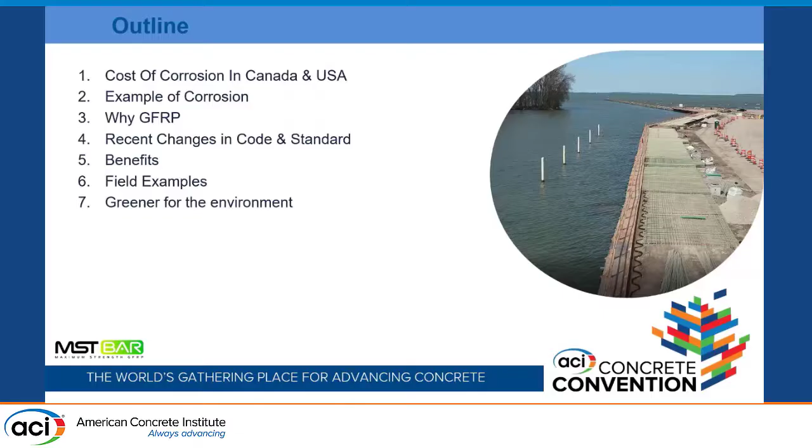This project is Port Clinton in Ohio. The entire port, 1.2 miles, was designed with epoxy-coated rebar. Everything switched to fiberglass rebar, and its installation cost and everything was better than traditional epoxy-coated bars.

This is not new. The cost of corrosion in Canada was estimated to be about $52 billion US. In the US, that's probably about $0.6 trillion. Who's paying for this? Taxpayers. All of us are paying for all these repairs.

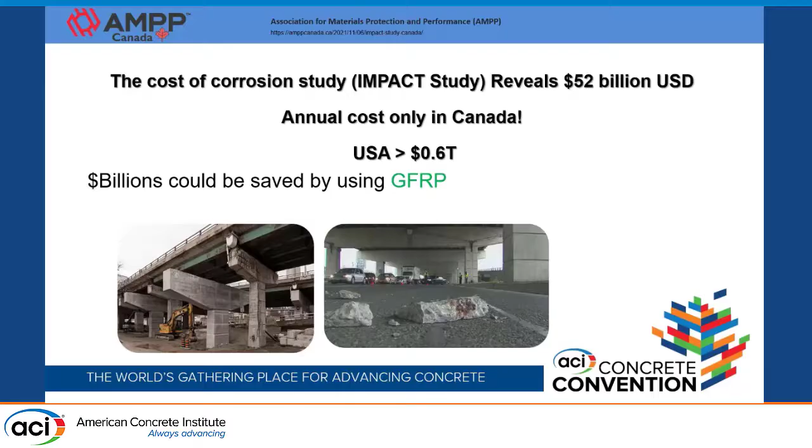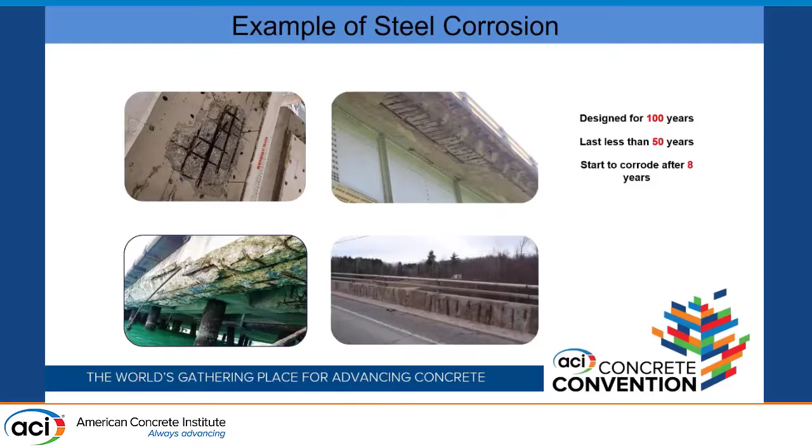These are examples of corrosion. You guys have seen this every day. I don't need to repeat that, but you know about parking garages, sidewalks, bridge decks, barrier walls, and so on.

A lot of people ask me this question: Borna, why do you keep talking about the rebar? Concrete itself goes bad. Well, that's not true. If you look at the Roman Empire, 6th century, they actually built the first bridge using salt water and cement-based materials. That bridge is still there with zero sign of corrosion.

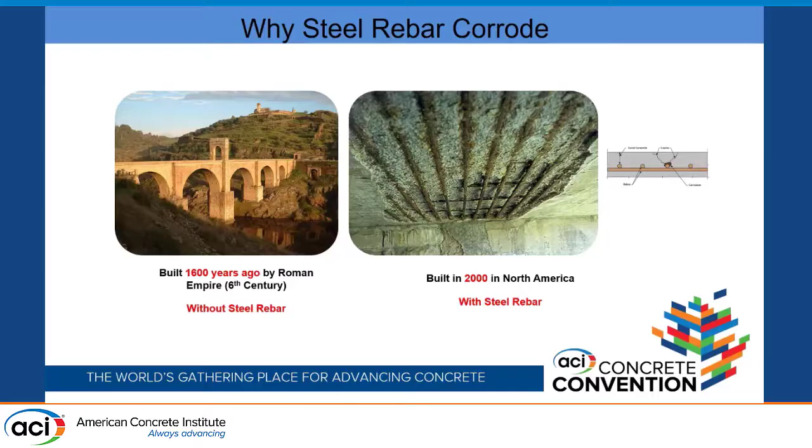In 2000, you build a bridge, and that's the corrosion. The problem is, by putting the steel in the concrete, you're introducing cancer inside the concrete. It's just a matter of time that cancer grows and basically destroys your concrete.

Also, I'm not the first one sitting in front of you guys talking about corrosion. This has been a challenge for structural engineers out there: how do we solve this problem? Black steel rebar, early 1900s, everybody was excited. This is a great material. 50 years after, oh my God, everything is rusting. What are we going to do?

Well, let's put some epoxy painting on top of that. Well, let's put some galvanizing on top of that. Well, we all know both of them didn't work, because as soon as the layer of epoxy or galvanizing is gone, the corrosion happens.

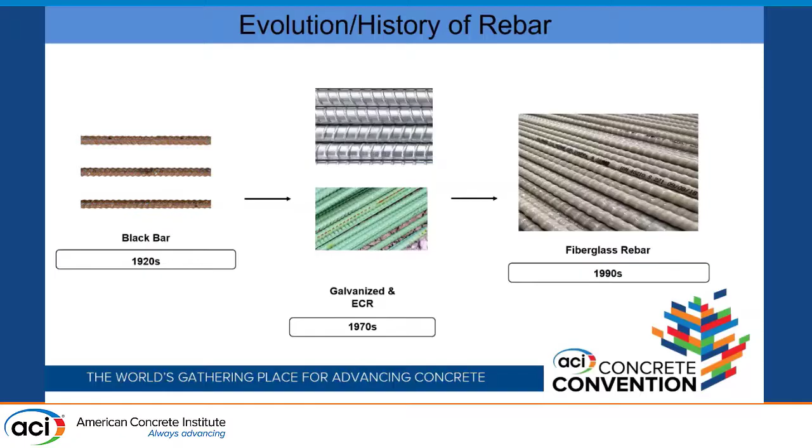So fiberglass rebar is also not a new material. It's been out there for 30 years, and there is a lot of research and development, a lot of universities, a lot of end users putting it in testing. So we're very close to saying fiberglass is really becoming the material of choice, because there is a nice time gap of materials being out there, and everybody's been using it in different industries.

Also, fighting against corrosion is not just about the rebar — structural engineers are always thinking about how am I going to fix that corrosion. Well, put some waterproofing membranes. Well, put some CNI, DCI, corrosion inhibitors, epoxy patches. It's out there, and each of those items costs money. Why do you do all this? Because you want to prevent the steel rebar from rusting.

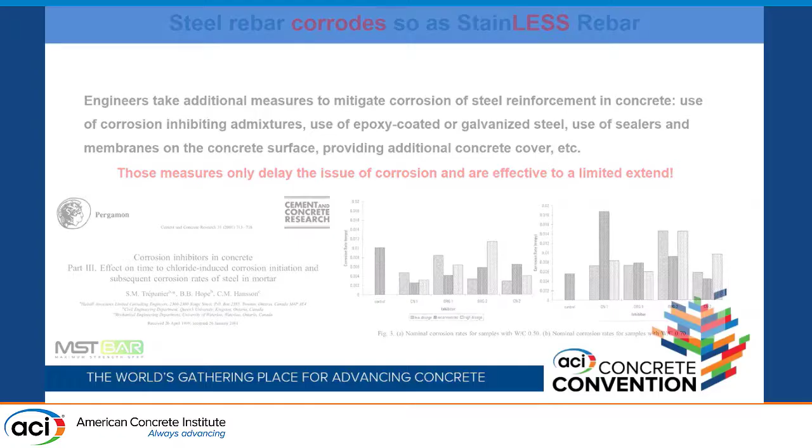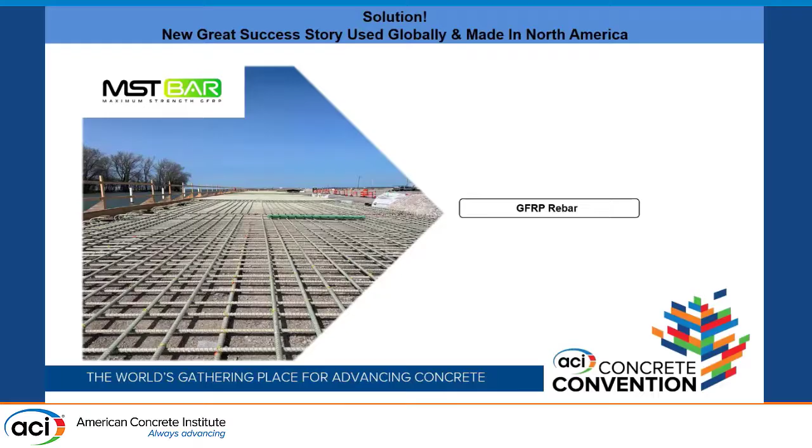Well, why don't you remove it from the first place and replace it with a material that doesn't rust at all? So what is the solution? The solution is glass fiber reinforced polymer rebar. And that's because you're eliminating the entire corrosion once and for all.

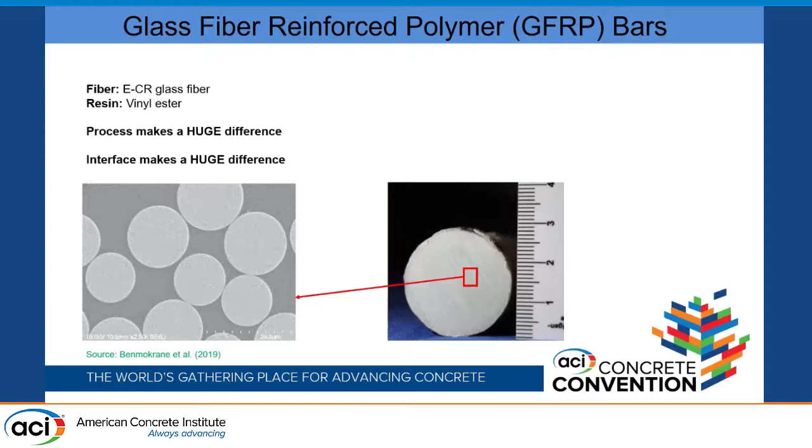That's about one of your hair diameters. So each of those fibers is about a third of your hair diameter, and they're all enclosed with high performance vinyl ester or epoxy, a very high performance polymer. 85% of that material is glass, silica based, and the remaining 15% is just a binder to put this together.

Fiberglass rebar is not new, as I mentioned, and a lot of you guys might ask this question saying, Borna, the way you're explaining this is the best material ever out there, why haven't we seen it often? Where have you guys been?

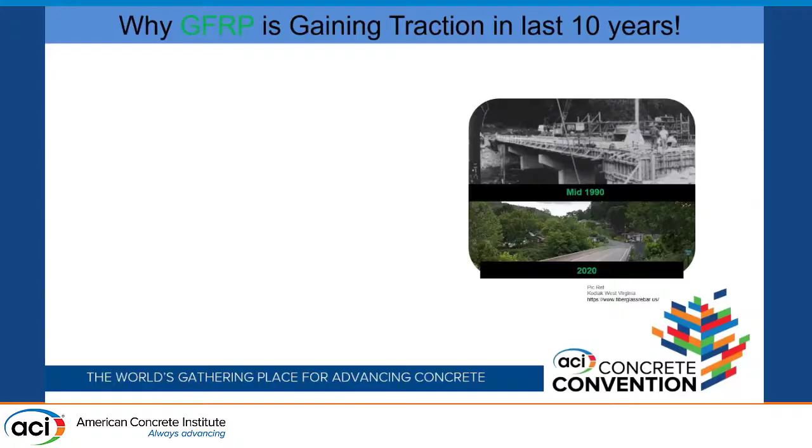Well, we have been out there. It's a slow movement. For structural engineers to adopt a new material, they need to see a lot of history. On the right side you see the first bridge made with fiberglass rebar, in early 1990, actually 1985 I believe, in West Virginia. That bridge is still intact with zero sign of corrosion. What's funny is the bar used there doesn't even comply with today's ASTM codes.

So you can see how much the industry is advancing, but that bridge is still there. Number one is a lot of structural engineers want to see that time history - hey, there's a structure sitting there for 35 years. Number two, in general, construction is a very slow adopting machine. I mean, you look at your cell phone, your computers, your cars, every year you have something new, and in construction, I think the last invention was steel rebar, so probably 100 years ago.

Number three is really the most important one, the engineering and codes, which I'll talk about in the next slide. The next one is increase in production. Really, the price of fiberglass rebar was always more expensive, so cost was an issue. Today that's been eliminated - the cost of fiberglass rebar is almost as close as black steel rebar. It's lighter weight, corrosion-free. That's why it's gaining a lot of momentum.

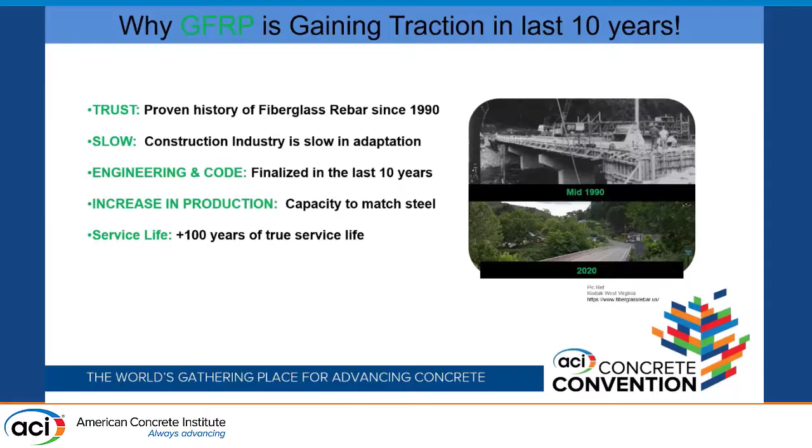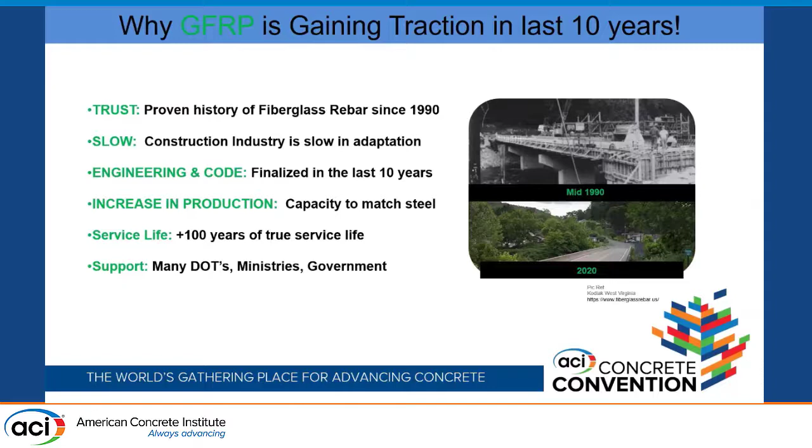And the service life - a lot of owners, DOTs, are expecting that service life. You're all paying for these structures. Everybody wants to see 100 years of service life out there. And the last one is the support from DOTs. Department of Transportation is looking for better and more sustainable solutions that can make these bridges more sustainable and more resilient.

A little bit about the code. IBC and IRC are the main two governing codes, and so far fiberglass rebar has not been part of these codes. We're really hoping in 2023 or 2024 fiberglass rebar will become part of the international IRC and IBC, which is a huge step forward for our industry.

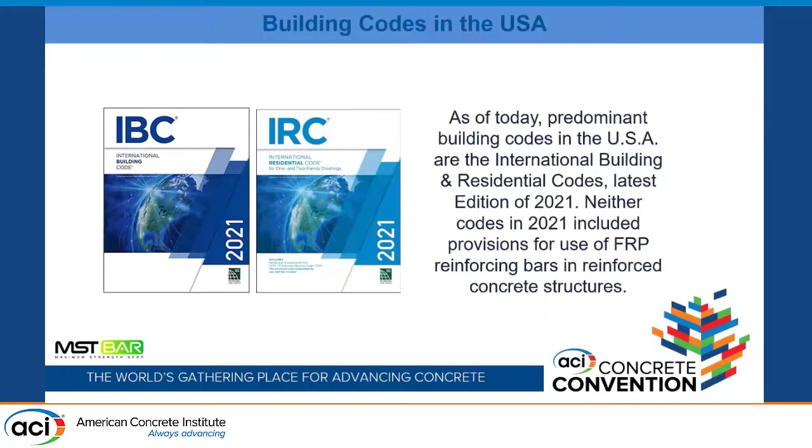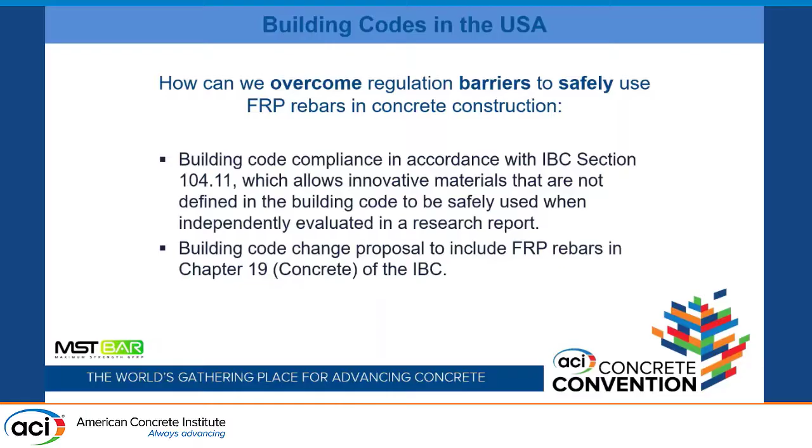But what we have been doing so far - you guys might ask, okay Borna, how have you been selling your product? Well, thanks to ICC. ICC was the only standard, an acceptance criteria written based on the performance of the materials, and it allowed our products to go out to residential markets. ICC was a huge step, which started in 2014. That was the first version, revised in 2022, and it keeps evolving, and that's really helped our materials get out there.

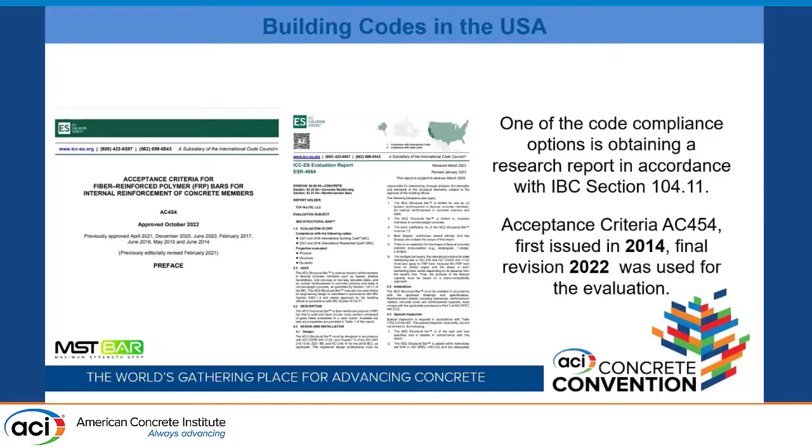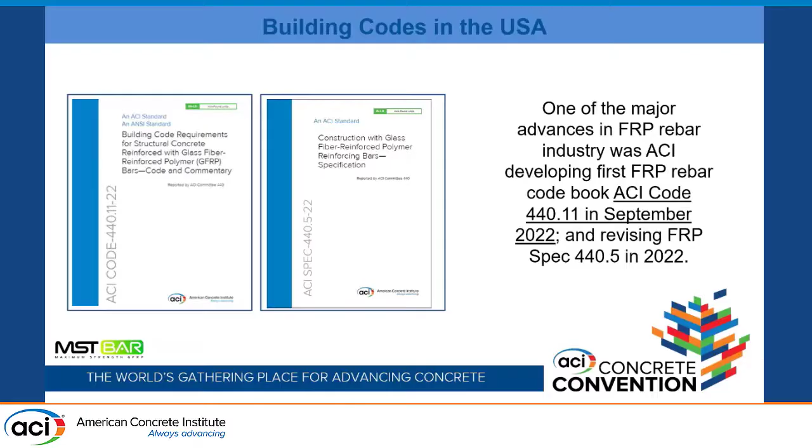We try to sell the materials by using ICC basically. So as I mentioned, this major standard is coming - the IRC and IBC are going to recognize fiberglass rebar in 2024. That's a huge step forward for us. You can see the proposal change that's been submitted.

And also the new version of ASTM is coming to life. So the new ASTM D7957, which I'm also a voting member of, is also being revised, and they allow for better performance. So as I mentioned, if that bridge 35 years ago used that rebar, the first generation of fiberglass rebar, the gap is probably from level 1 to 95 now. That's how much change there is.

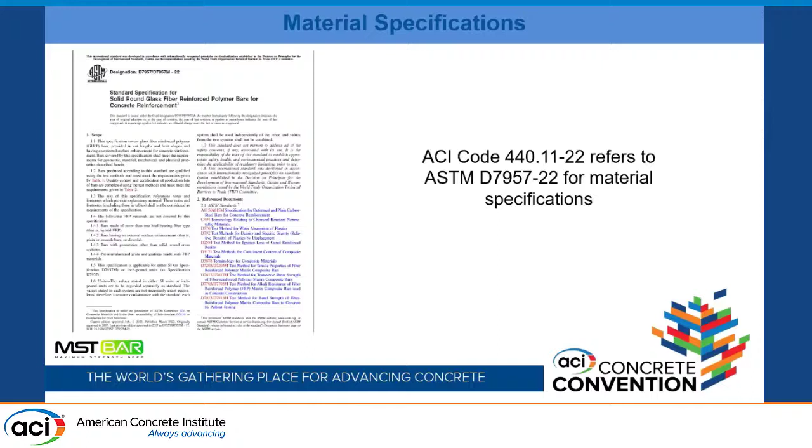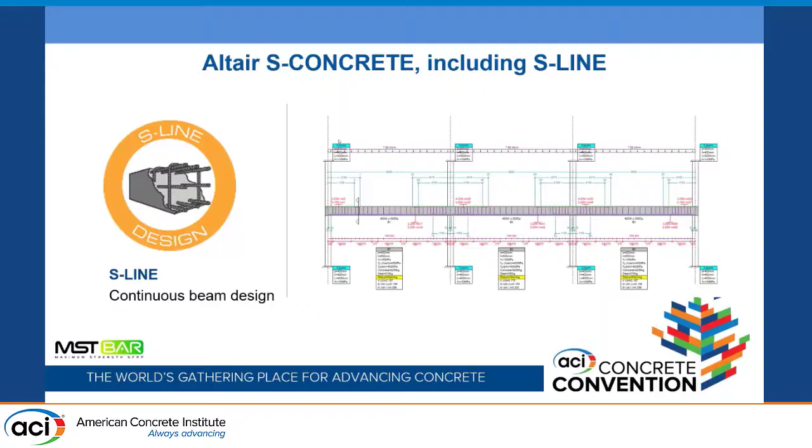That's the ASTM D7957 new version. And the next slide really shows that our industry has been working hard to make the life of structural engineers easier. We now have commercial softwares such as Altair - I don't know if you're familiar with S-Concrete, S-Frame, S-Line. Now there are actually softwares equipped with ACI 440, and you can go ahead and use it to design your structure. So now everybody has a design tool in their hand that they can use.

Oops, sorry, I just pressed the end button. There you go.

Also materials are becoming very, very popular in a lot of regions. Just to give you an example, Halton and Brampton are not always about the corrosion - they're actually fighting against the loss of networks.

I want to ask this question: how many guys have walked into an elevator with your phone on and lost signal? I can tell you all of you have experienced that. One of the major reasons is elevator shafts are reinforced with so much steel rebar that as soon as you walk in there, all that steel is stealing your signal. If today you live in a condo and have 5G on your network, I can guarantee your 5G won't work in the condo, and one of the reasons is the amount of steel you have.

So Halton region is planning to build a smart community. They want everything wireless, everything, surgery to be done from overseas. And unfortunately, steel brings some limitation because the faster the network, the higher the frequency and harder to penetrate.

In Brampton region, some firefighters have difficulty communicating with each other in case of fires. As you might know, Florida DOT, Ohio DOT, Michigan, Maine, Ministry of Transportation of Ontario, Quebec, Texas DOT, they're all having a specification for fiberglass rebar. So it's nothing new out there, but it's gaining a lot of traction now.

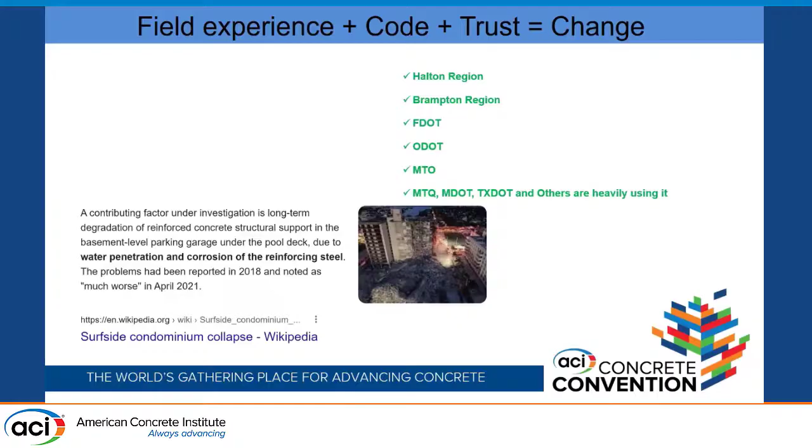So why consider GFRP? A lot of ministries of transportation in Canada and United States are adopting this technology. Now the material is ICC, ASTM, CSA, AASHTO, ACI - there are lots of codes out there that engineers can refer to.

It's reduced construction accidents and back injuries because of the lighter weight, and much easier to install. So in summertime or wintertime, you can really go out there and touch the bar without burning your hand or without freezing your hand, because the material doesn't conduct cold or heat. That's a huge benefit when it comes to performance and labor.

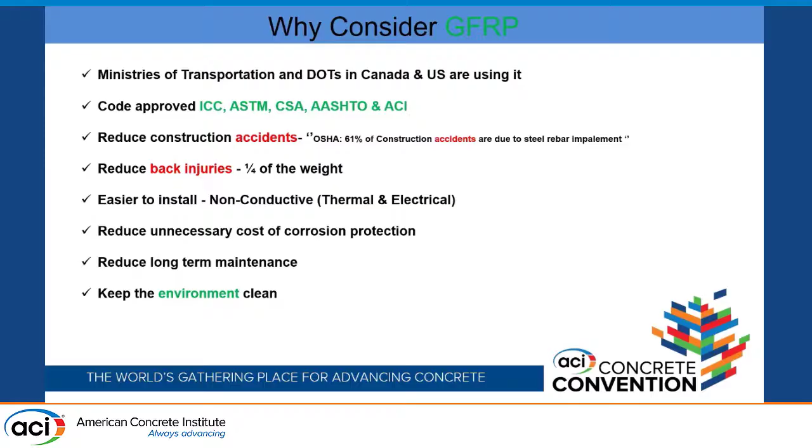Really, it removes unnecessary cost of corrosion. So you don't need to put in corrosion inhibitors or waterproofing membranes. You might need waterproofing membranes to make sure water doesn't penetrate, but at least you're not worried about corrosion of your reinforcement. And obviously, it reduces long-term maintenance cost and keeps the environment much cleaner.

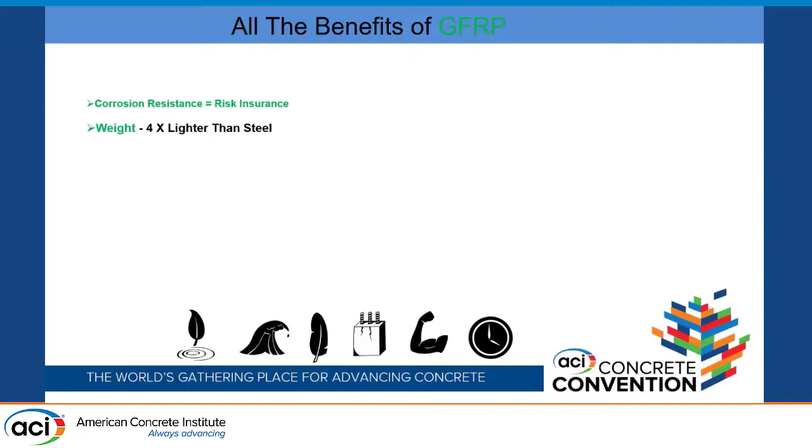This one slide really shows you all the benefits of fiberglass rebar. We talk about the corrosion. We talk about being 4 times lighter weight. I'm going to show you some videos on that.

The bond strength - not all fiberglass rebars are made equally. There have been a lot of new generations of the product. Today, products such as MST bar have about 3 times higher bond strength to concrete. And that was one of the unknown questions out there - how does the material adhere to concrete and so on.

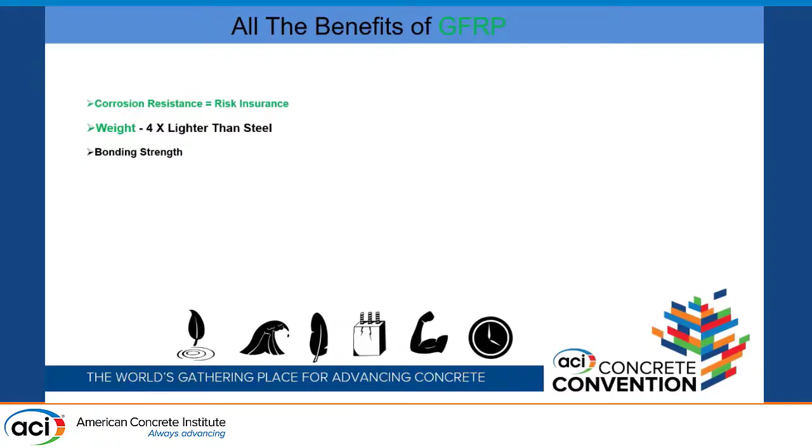Next is really easy fabrication of the materials. Fabrication process requires significantly less energy. You can have 500 bars and cut them with a diamond blade in 2 minutes. So the fabrication cost and the energy required to fabricate is significantly less.

Material is fire rated. Funny enough, a lot of people believe, oh, it's FRP, it's fiber reinforced and polymer based - how does it work? Yeah, we have a lot of test data. Hopefully at the next ACI, we will actually present the fire rating, but we have achieved over 3 hours fire rating in buildings. The tensile strength is over 3 times - guaranteed tensile strength of 145 KSI, compared to 40 or 60 KSI steel.

The material has significantly higher fatigue strength. This is one of those misconceptions out there. On the next slide, I'm going to show you a video that addresses the idea that fiberglass is brittle, it's going to break, it's going to fail, it doesn't give you a warning.

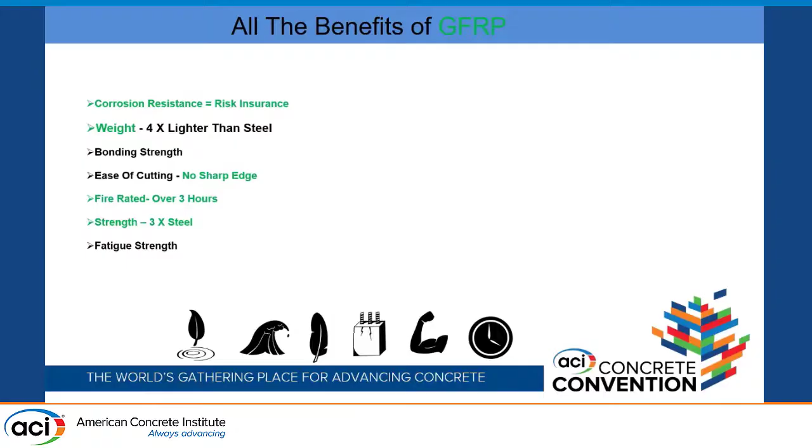Concrete is responsible for use of 10% of the clean water in the world. And clean water is very difficult in a lot of regions to find. The main reason you can't use that water otherwise is because of steel corrosion. So as long as you're using something that doesn't rust, and your concrete aggregates are non-alkali reactive aggregate, then you should have no problem.

Dr. Tony Nanni at University of Miami has done a lot of research with Florida DOT, and all those publications are out there - very interesting to read.

Material is not conductive, so we already talked about that. You don't need to ground the materials, and there's the thermal non-conductivity. I also talked about that with you guys.

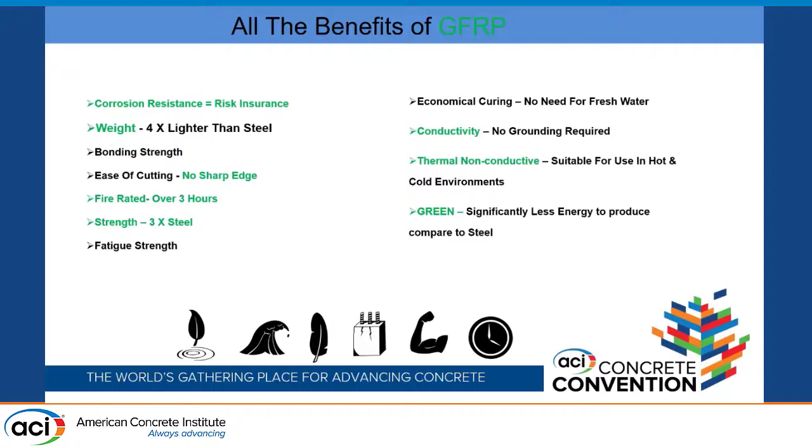And the material is significantly greener. If you walk through our facility, we are producing over 60,000 metric tons - equivalent to really a big mill of steel - and we are using the existing electricity foundation in our building that was there 30 years ago. So we didn't need to bring a nuclear power plant there.

This is a very cool video because it addresses a lot of the misconceptions out there. People are saying, hey, fiberglass rebar is brittle, it doesn't give you the warning, it doesn't do this, it doesn't do that. Well, we have done a lot of testing.

This test has been done at Concordia University. This is a simple beam, 16 foot span center to center of the support, 300 millimeters or a foot deep, regular concrete, 6 inches, with 2 pieces of number 5 rebar running at the bottom. We put this under cyclic loading of 2 hertz, 2 cycles per second. The loading on top is 24,000 pound force, or 110 kilonewton, 1.7 times service load. This video has been recorded after 2 million cycles. We did the same test with steel, and it only lasted less than 20,000 cycles.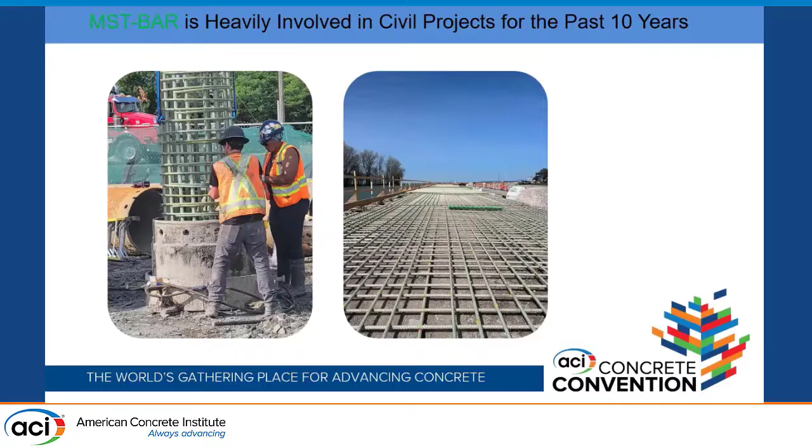So we've done a lot of heavy civil work, and now we're doing a lot of residential work too. I'm going to show you a lot of heavy civil work and a lot of regular residential projects.

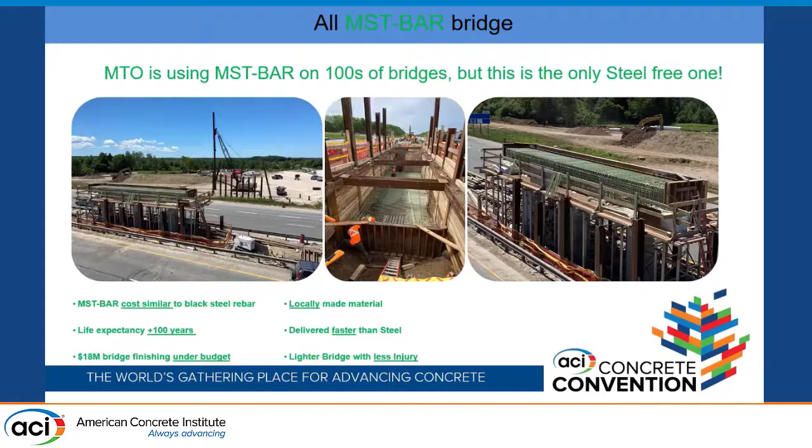Some of the big projects: an entire bridge reinforced with GFRP bar, not a single piece of steel in there—foundation, middle pier caps, columns, everything, retaining walls, all reinforced with fiberglass. Once and for all, you're removing the whole steel out of the equation. That means there is no corrosion.

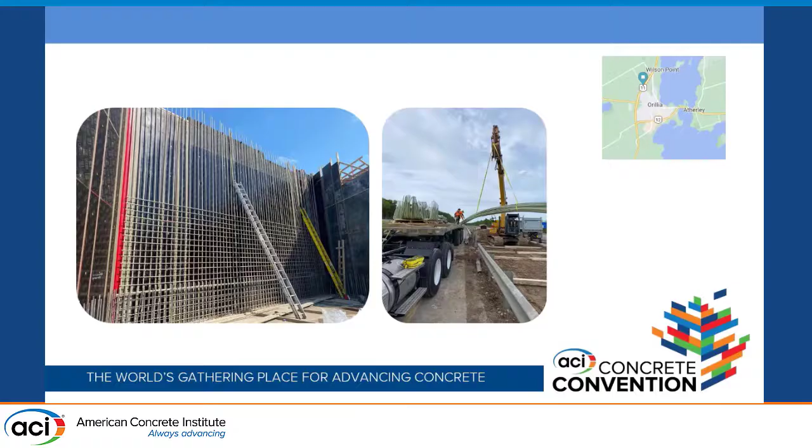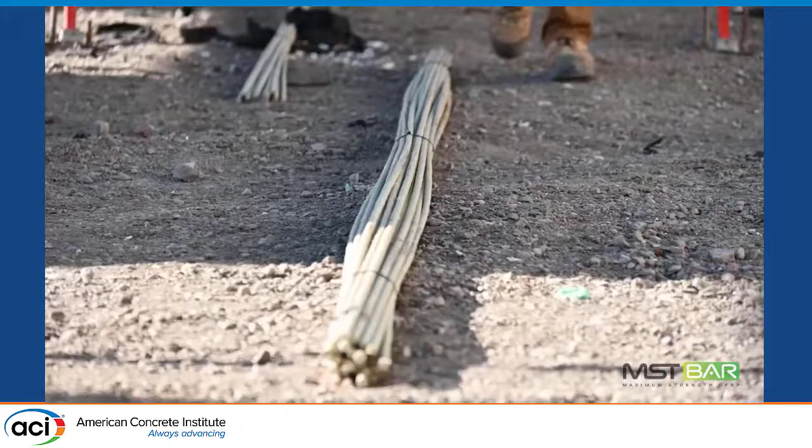One cool video just to show you how light the material is. This is 25 pieces of 10 millimeter bar, 12 millimeter bar, half an inch, 20 foot length bar, and we literally have to find the skinniest guy at the job site to help us lift this.

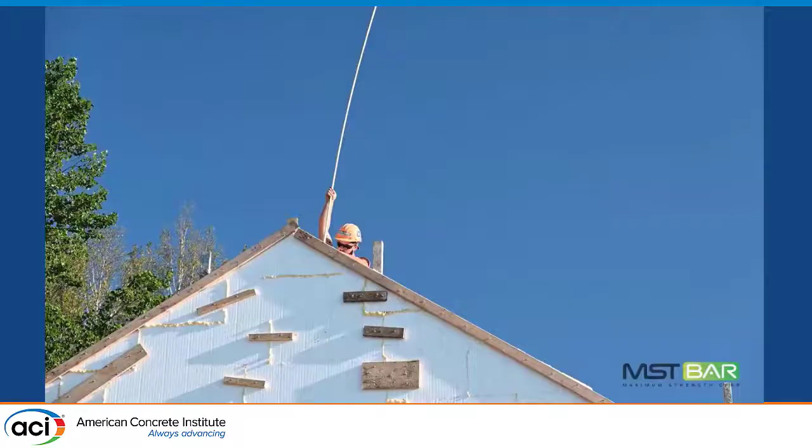So the weight matters on two sides: one is labor, the other is transportation. By lowering the transportation, the number of trucks delivering the bar to the job site, you're definitely eliminating a lot of the carbon dioxide footprint.

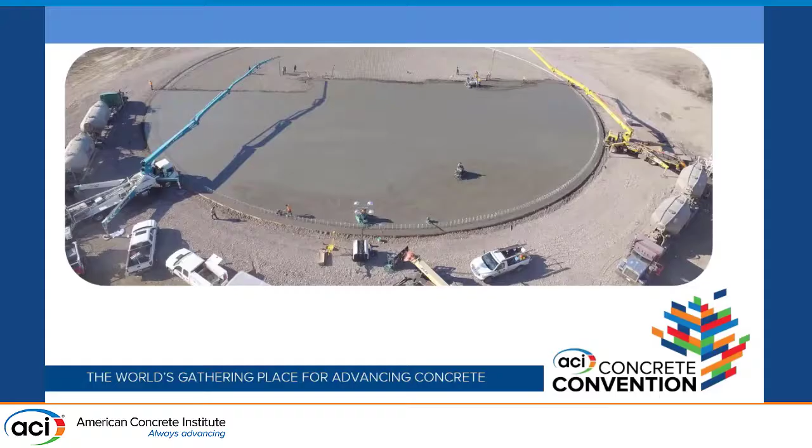300 feet, 250 foot diameter slurry tanks for animal waste—the owners used to change these every eight years. What is the cost of demolishing all that concrete and rebuilding it? How much carbon dioxide are you putting into the environment versus using something that doesn't rust? You're increasing the service life and not having any corrosion problem.

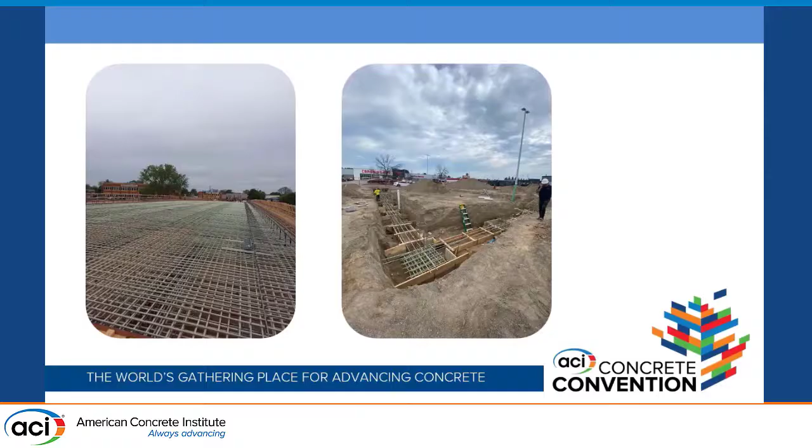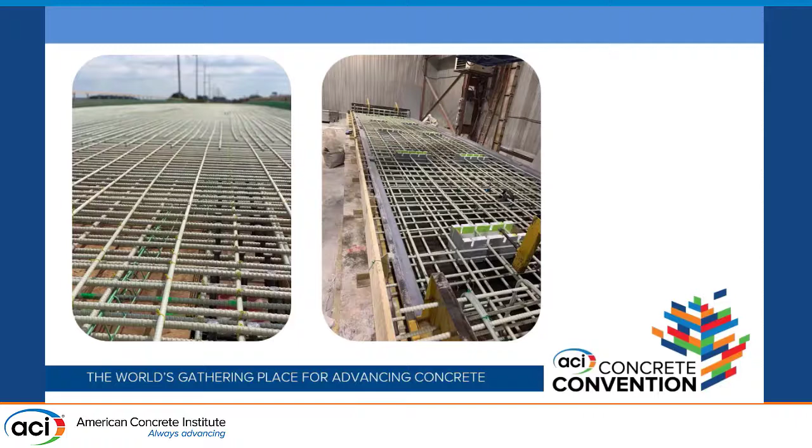Some more examples: a bridge deck on the left side, and on the right side, simple footings and foundations, really no limitations. And more residential pictures—the picture on the left shows a cast-in-place bridge deck, and the picture on the right is a precast bridge deck.

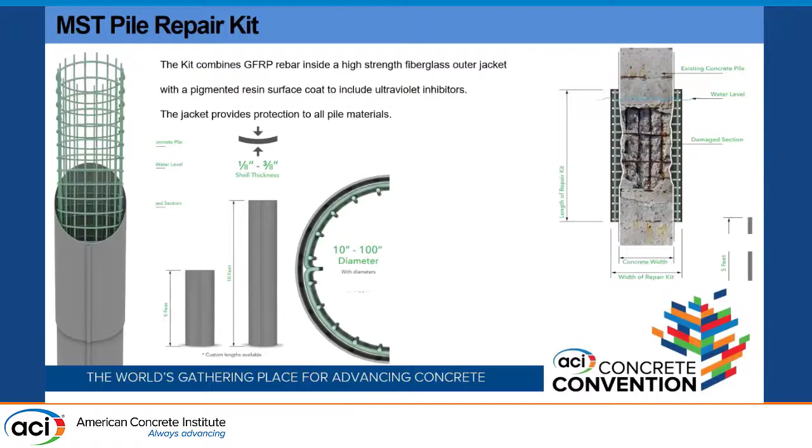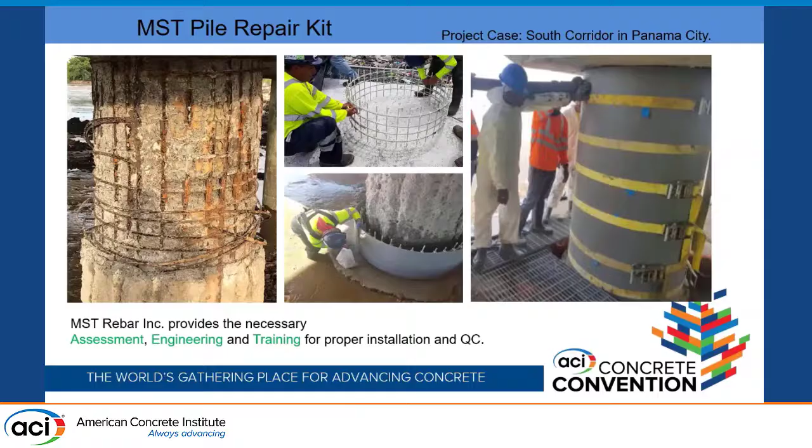We're also using fiberglass rebar for repair applications. It's not always building a new structure—we are using it in repairs. If you have a damaged column, you put fiberglass around it, a fiberglass shell on the outside, pour your concrete, and you build a brand new concrete column with non-corrosive material in there. That's an example of the repair. You can see the column.

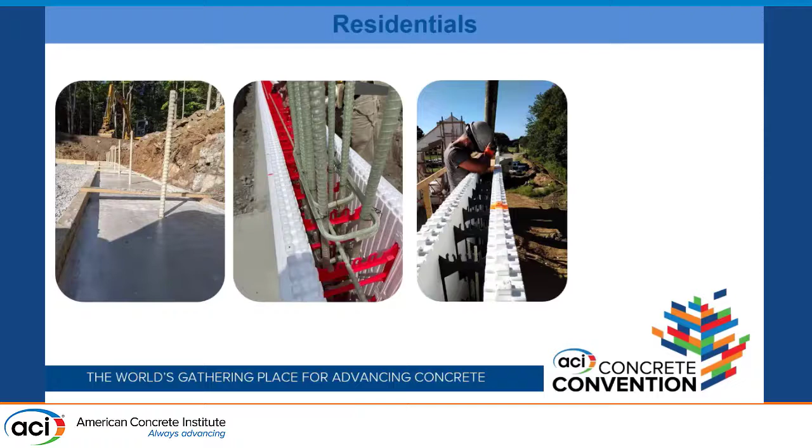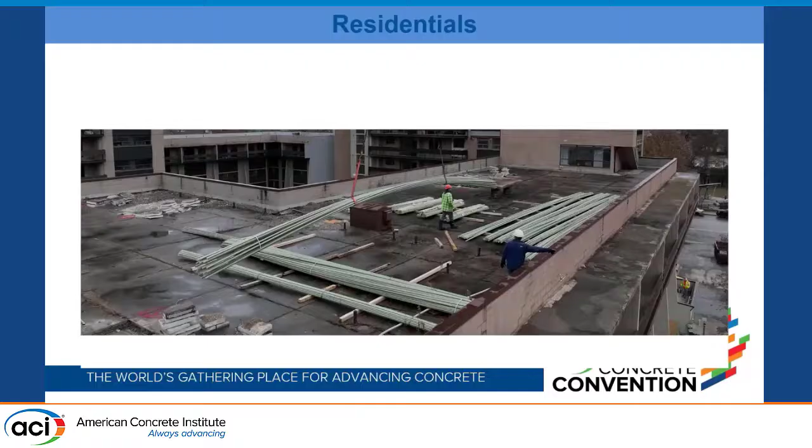A little bit on residentials—I'm going to finish the presentation soon. Simple footings, walls, 8-story buildings. These are number 11 bars. You lift it onto the roof, easy to work with. The laborers perform really well up on the roof—the guys are doing things fast.

Parking garages, this is 2 levels below grade, and the workers have to carry the bar by hand. Imagine carrying some number 11 bar by hand 2 levels down—it's exhausting at the end of the day.

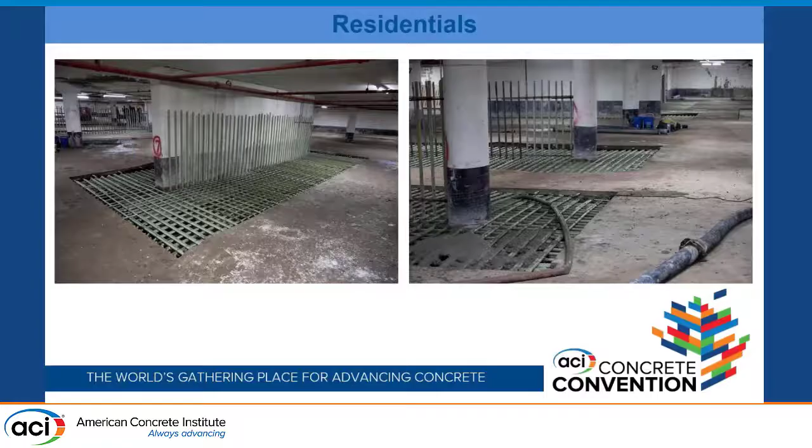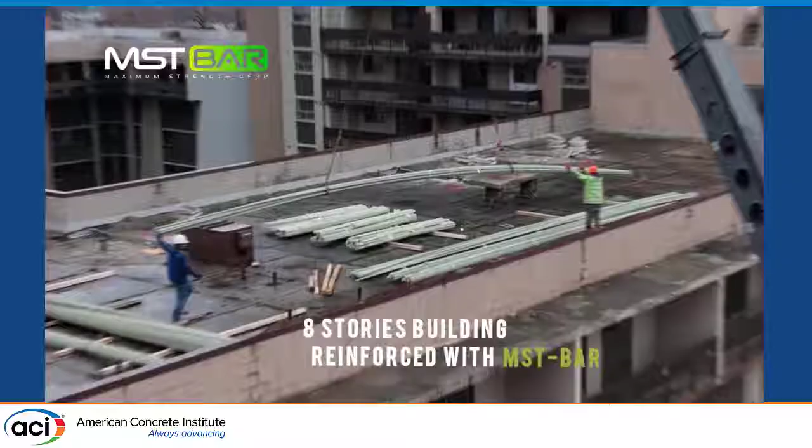Here's a little video just showing you where it's been used in residentials—these are shear wall applications, about 80 shear walls in total. Materials delivered to the job site, fast and easy.

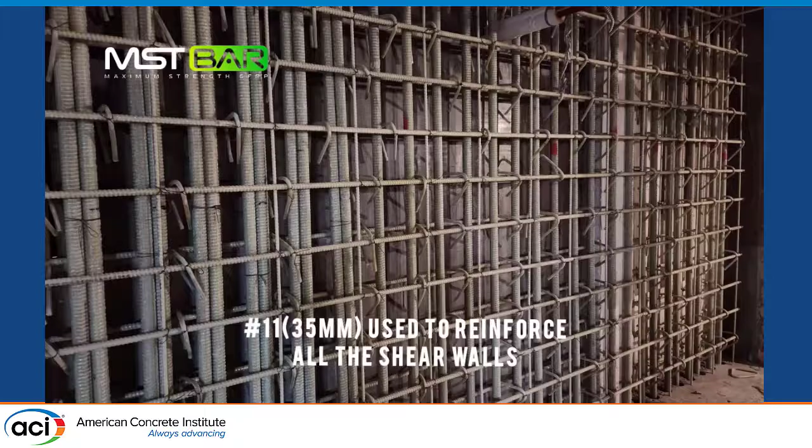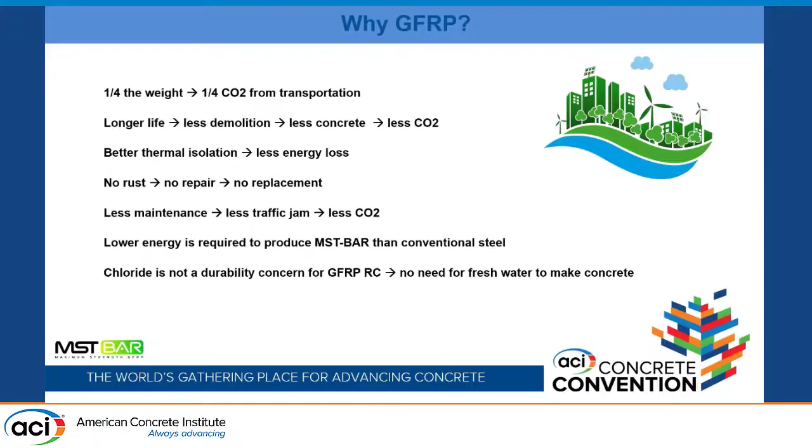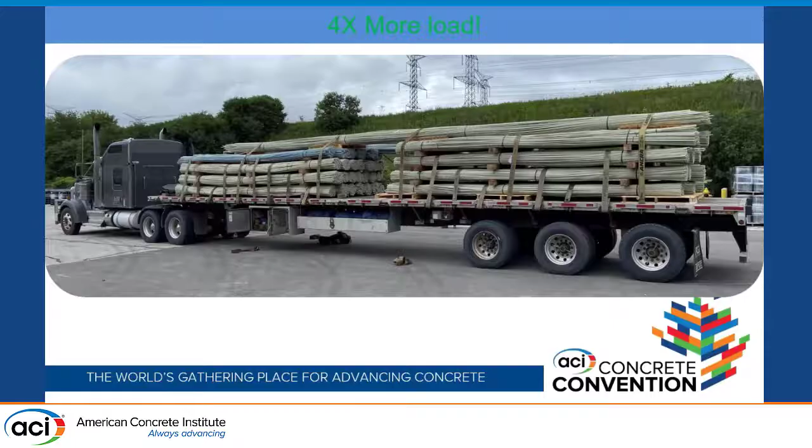And the last slide really shows how much bar you're actually able to put on a truck versus steel—you'll barely fill up the first row. Thank you very much, everybody. I hope you enjoyed the presentation.